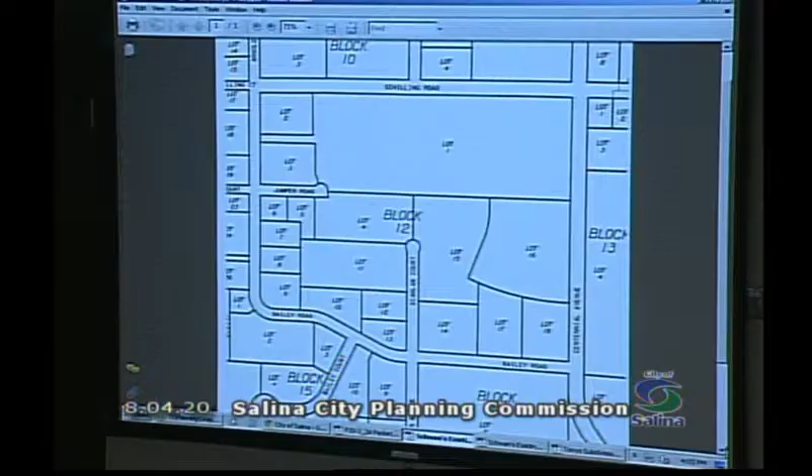So in 1997, as part of upgrades to the infrastructure out in the airport area, the Salina Airport Authority worked to replat the properties throughout the airport area, breaking it down into multiple plats. In our staff report, we talk about how the Schilling subdivision had a number of deficiencies: lack of identifiable or dedicated right-of-way, gaps, properties that only had 3 sides to them, and unclear utility and drainage easements.

And so there were infrastructure improvements that were going to be made, but the replat helped decide which streets were public and which were private. This particular area, Schilling number 5, had 468 acres. It was divided into 124 lots and had 15 separate blocks.

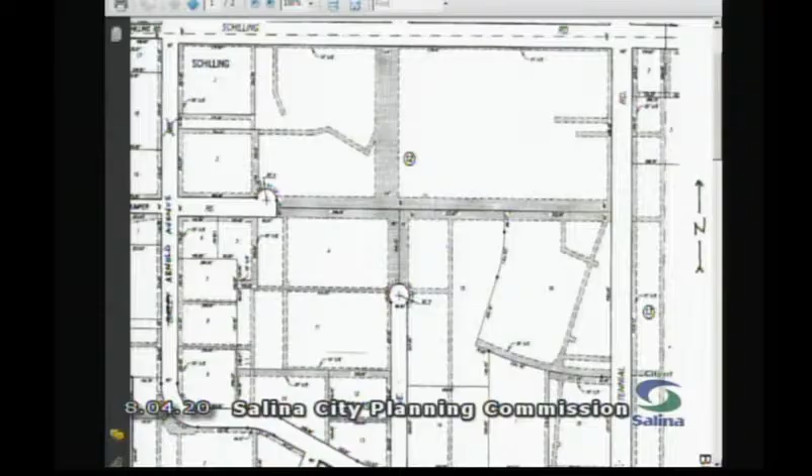So this is block 12, and you can see there's all these individual lots that were platted back at that time. We've highlighted some of the changes that were made, and 2 of the changes that affect this. Originally, Jumper Road went through here as a public street, and Scanlon Avenue went all the way through up to Schilling Road as a public street. Scanlon Avenue was terminated here, and Jumper Road was eliminated as a public street here, and then this section of Jumper was retained.

So the Planning Commission approved this replat and this layout in 1998 in August. This is block 12, the site of the Tony's Pizza manufacturing facility. As we noted, it's bordered by public streets on all 4 sides, and we had a street name change in 2016.

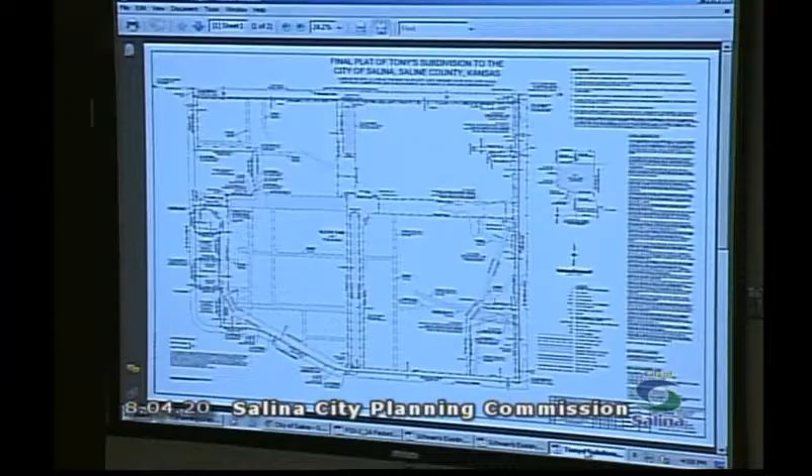So now we have an application submitted with a plat drawing that proposes to replat the land holdings there into a single platted lot to create a corporate campus. This area within the replat contains 77 acres and is currently subdivided into 18 different lots, bisected by several public streets and public utility easements.

So the purpose of the replat is to eliminate a lot of the internal lot lines and merge the land holdings into a single lot and block. Some of the most extensive work is to eliminate internal utility lines and utility easements and clean those up. Then part of the plan is that this section of Scanlon Avenue that extends north would be completely vacated as a public street and revert to private ownership.

The other part of this plan we'll discuss a little later is there's quite a bit of stormwater runoff that comes off the runway to the west, and presently it kind of goes right down Jumper Road through the campus. As part of this project, they're proposing to divert the water to a point here, put it into an underground box, and take it around the campus. Then we'll a little later show you some proposed detention ponds across the street on this property. But those are some of the purposes of the replat.

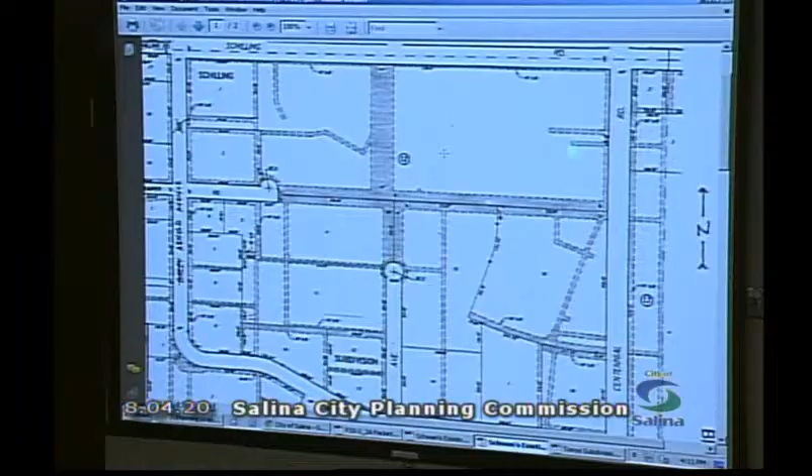Schilling and Centennial are arterial streets, and there was historically restricted access dedicated along these frontages except for these approved openings, and that would be retained as part of the replat. The way restricted access works is that you can only have access to your property through the openings approved as part of the plat. If you want to create additional openings, you have to request a break in restricted access. These hash marks just mean no curb cuts in those locations, but it's showing a curb cut there. So one of the things the plat will do is identify approved access points on the plat.

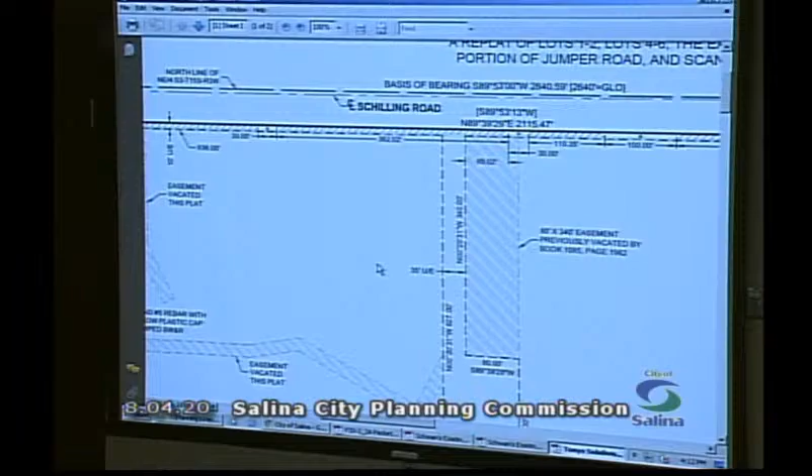One of the things staff reviewed extensively with the consultants for the applicant was there's a number of existing and proposed water lines, fire hydrants, and sanitary sewer lines that either were installed or will be installed privately, and they will be owned and maintained by Schwan's Global Supply Chain. So only those utility lines located within dedicated public easements will be considered public utility lines. We'll have a note on the plat indicating that all water lines, fire hydrants, sanitary sewer lines, and storm sewer pipes not located within dedicated easements are private.

So, as I noted, there's been some drainage issues, particularly from runoff coming from the west.

The engineers are proposing to design a stormwater collection system that will utilize an underground concrete box to collect the stormwater runoff and run it parallel to Arnold.

It will discharge into some detention basins that will be created here. I think there was a drawing that showed the two detention basins south of Arnold. Okay, there it is right there.

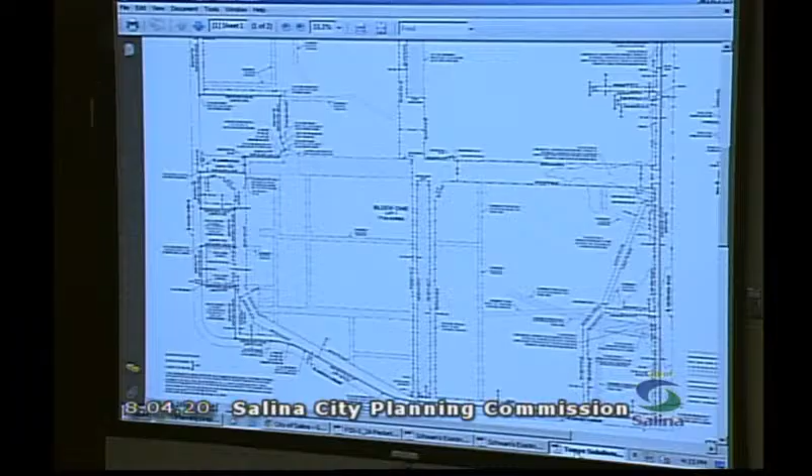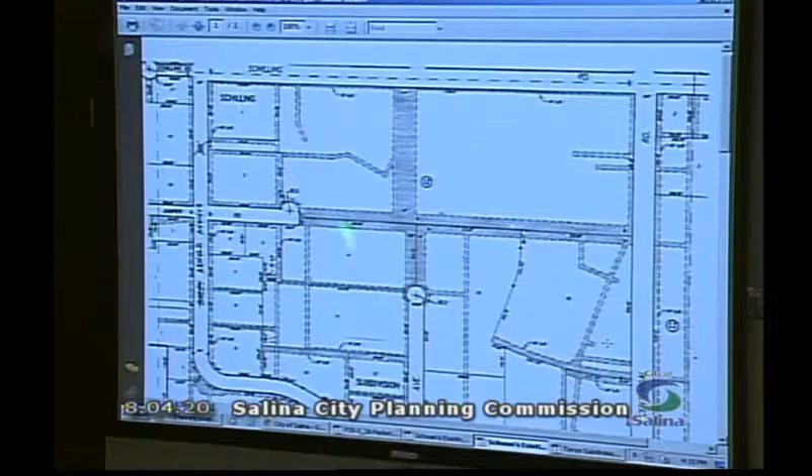One thing we wanted to talk about—if you could go back to the original plat, Dustin. So this is Jumper Road, and this is property owned by UniFirst. There was a proposal on the replat to vacate this part of Jumper right to here. One thing we wanted to point out was...

There's a couple issues we've identified with that aspect of the plan. Because this property right here, under state law, if it's vacated, this portion would all revert back to the ownership of UniFirst and not to Schwan's Global Supply Chain.

Secondly, it can't be closed or vacated without the written consent of UniFirst. And then the third thing is that even if it is vacated and that part closed, the reason this is here is that our subdivision regulations require that all public streets that dead end have to have a cul-de-sac or turnaround at the end of them.

So one of the options that the applicant can consider is that this portion right here could be eliminated entirely as a public street, and there could be a side agreement reached with UniFirst to essentially just have a shared access driveway that's not a public street.

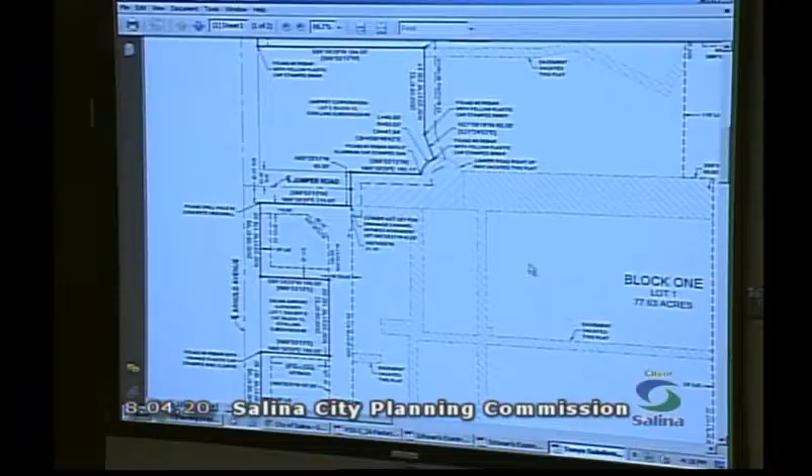As we noted, the other dedication is retaining the restricted access markings on Schilling Road and Centennial, except for existing access points. So we have reviewed that and are suggesting several conditions of approval.

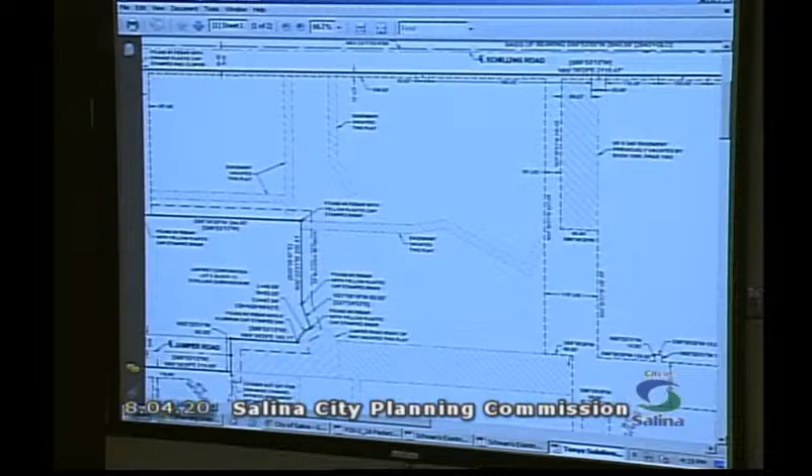One, the first being what we just discussed, the configuration of Jumper Road extending west of Arnold shall be retained as is, or Jumper Road shall be converted to a private shared access easement in cooperation with UniFirst.

The off-site drainage easements for the stormwater detention basins shall be dedicated by separate instrument by the property owner. Since those aren't part of the plat, that has to be addressed separately.

Then we're suggesting two notes be added to the plat. One is that all internal water lines, fire hydrants, and sanitary sewer lines within the subdivision are private lines owned and maintained by Schwan's Global Supply Chain, unless they're located within dedicated public utility easements shown on the plat.

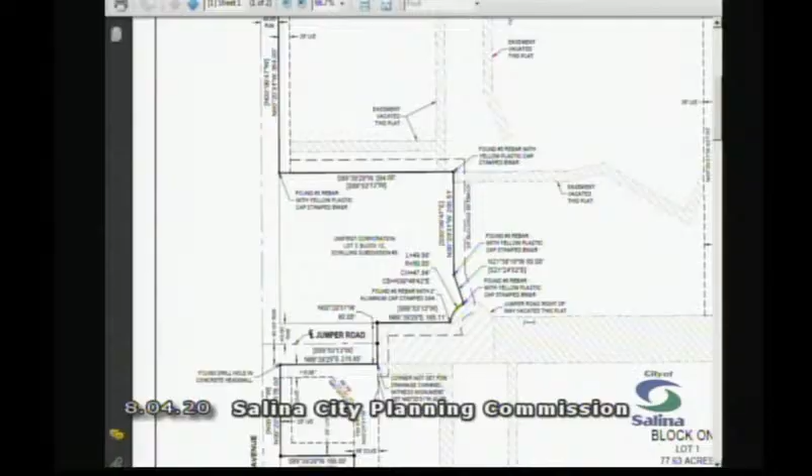So the purpose of that note is just to clarify for future reference that if there's a water line and it's not specifically in one of the easements shown on this plat, then it is a private line owned and maintained by the property owner. That becomes important between the city and the property owner as a maintenance responsibility to set that out.

And then the other note is that by virtue of this replat, all existing internal utility easements and street right-of-way are hereby vacated, except for utility easements and street right-of-way shown on this plat. So the purpose of that is to say any roads or easements that might have been on this property historically are all wiped out, and only the easements shown on this plat are valid. Again, that's to help for future reference.

And then we have some technical corrections that we received from the Register of Deeds and City Surveyor about the plat drawing and the plat certificates.

One of the things you'll note attached to the application is what we refer to as property owner authorizations. Part of that is that the Global Supply Chain has contracts to purchase some of the property currently that they haven't closed on and taken title to, and so those properties and owners have authorized inclusion in the replat. It's just at this point in time, those properties have not been outright purchased by SFC Global Supply Chain.

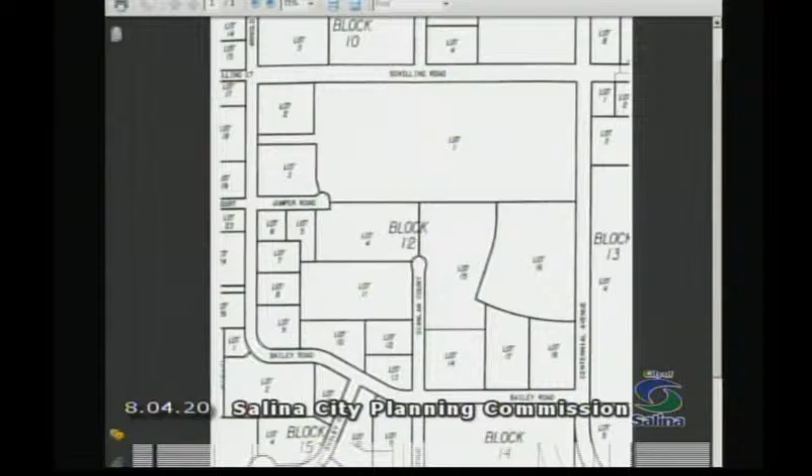So with that, I'd be open to any questions that commissioners might have. We do have a representative of Global Supply Chain here if you have questions you want to refer to them.

You have in your packet the letter from the city engineer that reviewed their drainage study and calculations, but I think we didn't include it for Dustin to put on the screen, though it is in your packet. If you look at the drawings of the drainage in the packet, it's kind of amazing how much water, how far from the west the water runoff comes from, going through this property trying to get to that little creek channel on the east side of the property.

The other thing, I don't think, Dustin, do you think you could go to the aerial photo and turn on the utility layers?

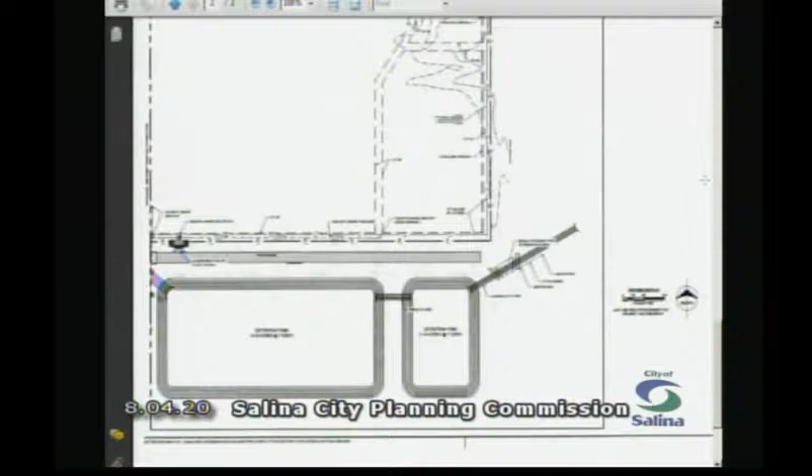Good. All right, any more questions for the applicant? I think we're set, thank you very much. Absolutely.

So again, if you could go back to that shaded request area map, not this one, but the one that has the shading on it, Dustin. As it relates to Mr. Baffa's question, condition number 1 says that because this is owned by UniFirst and can't be altered, changed, or vacated without their participation and consent, Jumper Road has to stay the way it is, or SFC Global Supply Chain can get with them and, with their concurrence, this entire street could disappear as a public street, and there would just be a shared access road owned half by UniFirst and half by SFC Global Supply Chain.

So the purpose of that condition is to respect the rights of UniFirst to maintain access to their property, but also to give SFC the opportunity to get with them and maybe negotiate something that would preserve that access, but also be beneficial to get rid of the segment that goes beyond their access.

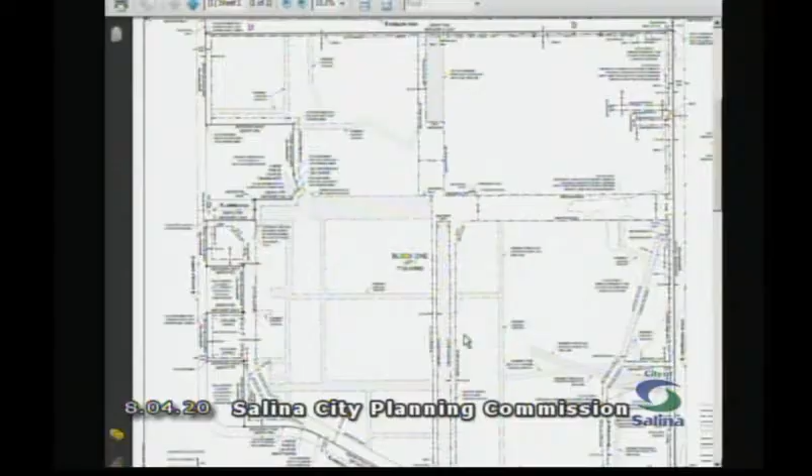This little segment right here has natural gas, electricity, water, sewer, and a major AT&T fiber optic line. So the replat is really important for those utilities, and this has been provided to them for their review and comment. What you're seeing here reflects the product of their input, and that's something for you to take into consideration. It's important for staff and the owners to work closely with the utility providers, because one of the important aspects of platting is to make sure you have utility easements in the right place, because those are very important for the utilities we kind of take for granted and rely on, which is electricity, gas, phone, and water and sewer.

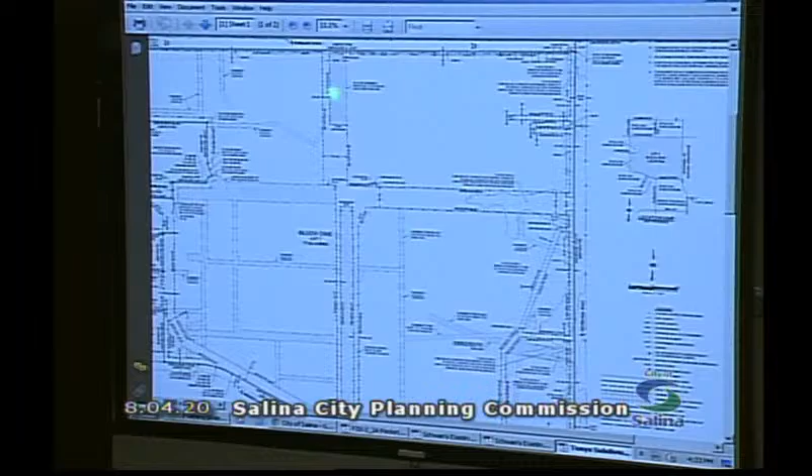So platting is an important part of making sure that property is served by those utilities. The shaded area is going to stay as easements? The shaded area is going to be eliminated as easement, and the clear areas—so here, this part here would be eliminated, but this clear part here would be retained.

It's easier to see close up, but if you slide over to show a little bit more to the left, Dustin, this is just a note of an easement previously vacated. There's a number of things—this easement was previously vacated. There are other shaded areas that will be vacated, and it's just these areas here that are not shaded that will be retained.

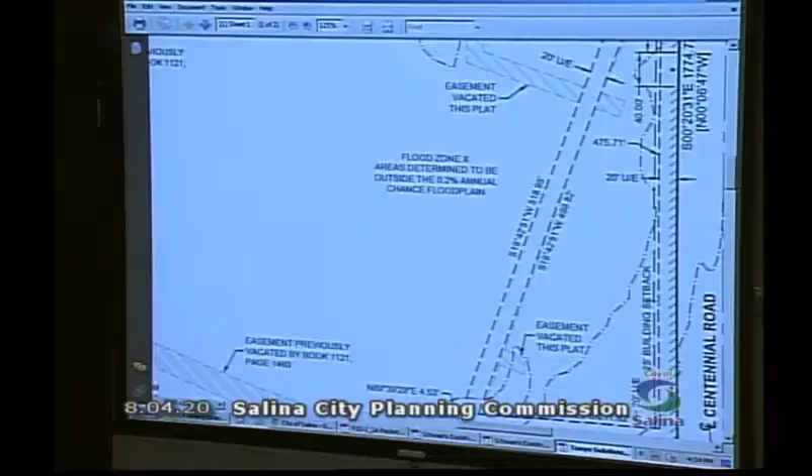What we will do when it actually gets recorded is we'll have all these eliminated off of there on the recorded version, so the only thing left on the recorded plat will be the easements that are remaining in place.

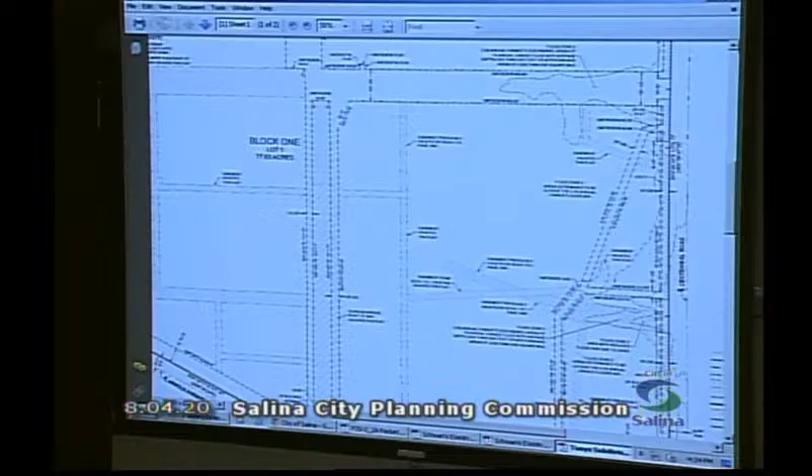But this was helpful for the reviewers. It's helpful for you to see the parts being eliminated, because it shows how this property is crisscrossed with easements and things that make it difficult to be a campus. Part of the efforts to make it a campus is to get rid of these internal easements, because you can't build across easements, but if they're no longer easements or there's no longer utilities in them, then they're not an obstacle to construction.

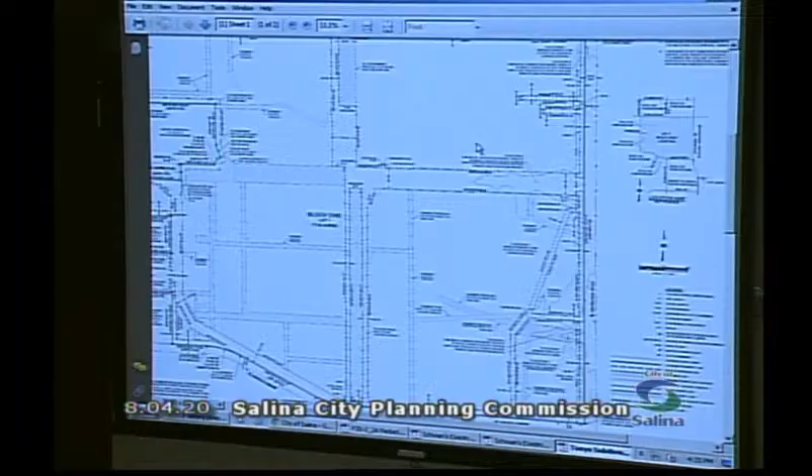Can you zoom in closer on the north part of Jumper Road? Is that an easement that will be coming out on the top part of that cul-de-sac? So there, you're talking about this right here? No, just straight up from the circle on the cul-de-sac. Is that an easement that goes straight up from there? If you go straight up—

This right here is an easement that will be retained, and it will go up here and around like that, and then these will be vacated by the plat. Okay, so these are all coming out. And again, some of those are water lines or things that date back to when the Air Force Base was there. The water lines would be demolished and the easements would be eliminated.

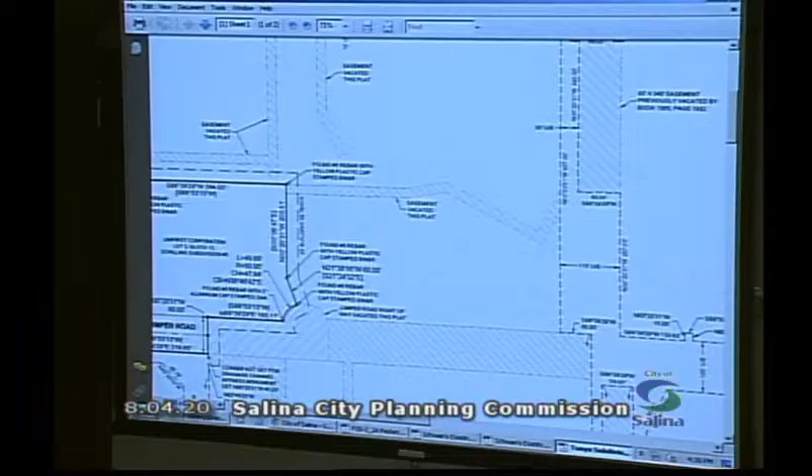We're ready for a motion? I guess we should just cover our bases, make sure nobody from the public wants to make a comment, or at least say it.

I'll move that we recommend to the City Commission to approve the replat of application P20-2/2A with the staff recommendations on page 6. Seconded. It's been motioned and seconded. Those in favor say aye. Aye. Opposed?

So for your benefit, and I think it's on the schedule, this will go before the City Commission on the 24th of August.

I will look at our preliminary discussion items—we don't have any items to discuss about upcoming matters at this time, other than to say there's only one meeting scheduled for September, which will be our business meeting and election of officers. One thing that's awkward about that is new board appointments are approved by the City Commission on the 24th of August, so there won't be a lot of time between the 24th and the 1st.